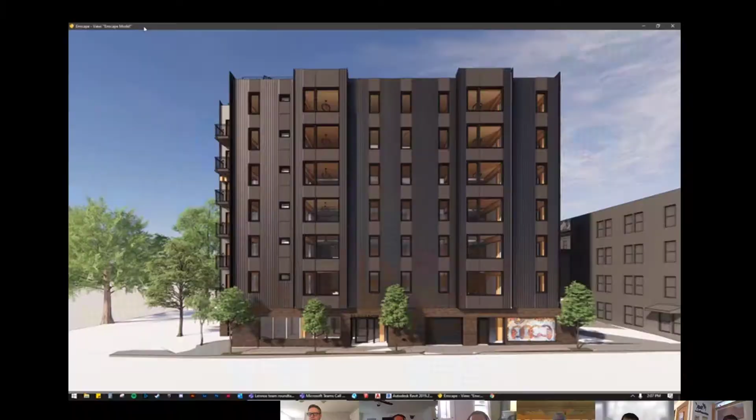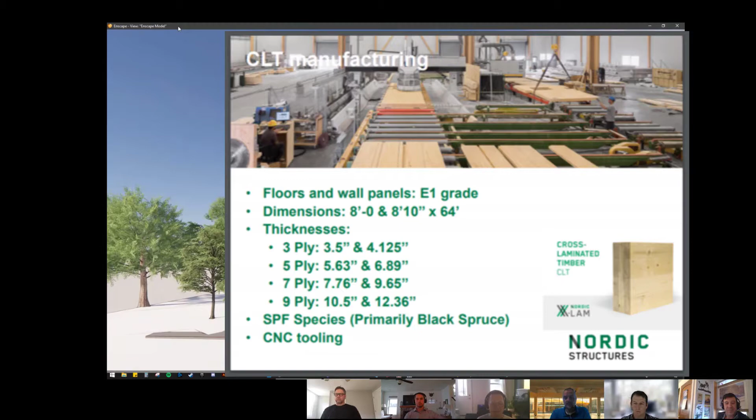I'm the business development manager for Nordic Structures. Been working with the company for 20 years and involved myself in the early phases when Nordic had made the decision to build a CLT plant, but before there was any real demand in the market. And Nordic's path to building CLT and mass timber projects, I think, is really informed a lot by the journey that we had to take. Because of the lack of demand, we became our own development company.

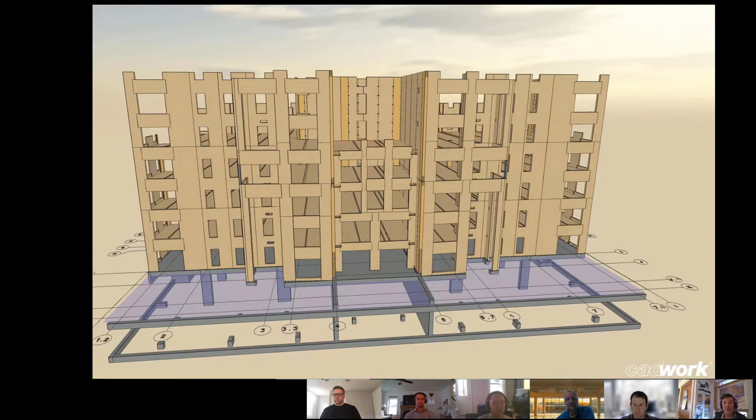But I recall when I told you I had this really cool young team out of Boston who was going for a 7-story wood structure with no podium in 70 feet. You might have raised an eyebrow at me on that one, and we might have not been sure these guys were going to be able to do that. Can you give us some hints how hard that is?

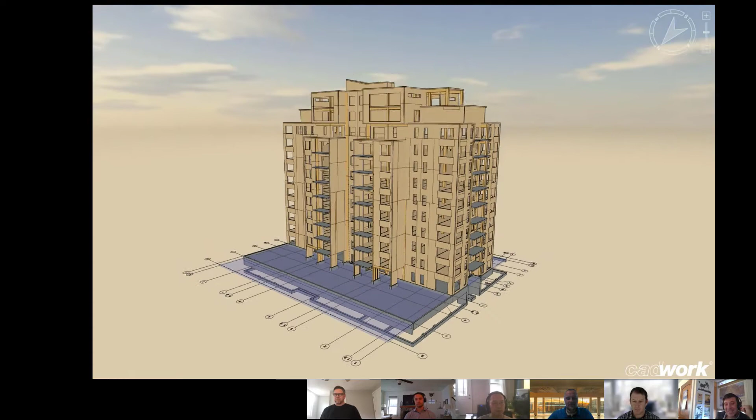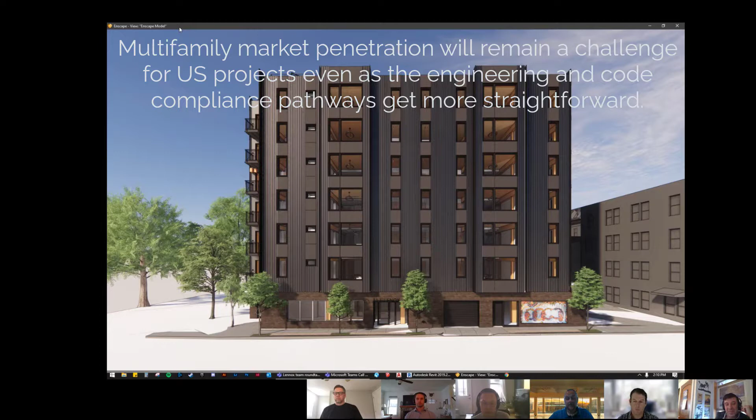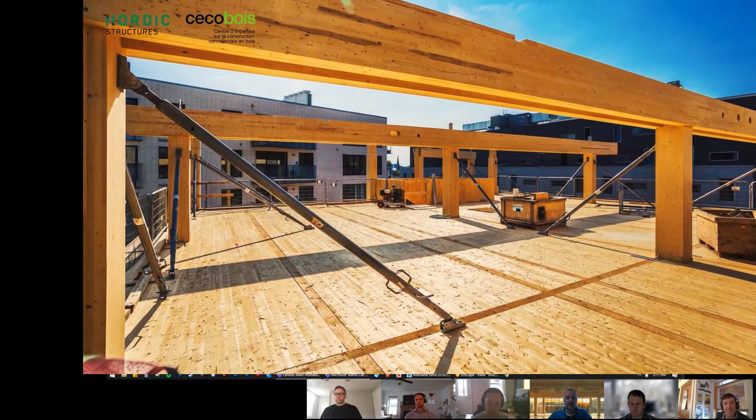Well, yeah, I think maybe my jaw dropped and the eyebrows raised, and a little bit of incredulity. We hadn't had a lot of success actually developing multifamily res in the U.S. There had been some projects that we had executed successfully, and actually the very first multifamilies that were done were for the U.S. Army. Fortunately for us, we had experience in Quebec, Montreal specifically, which is a very aggressive market. Concrete is incredibly cheap, and we were building 8-9 story buildings using mass timber, to be able to be competitive in that concrete jungle.

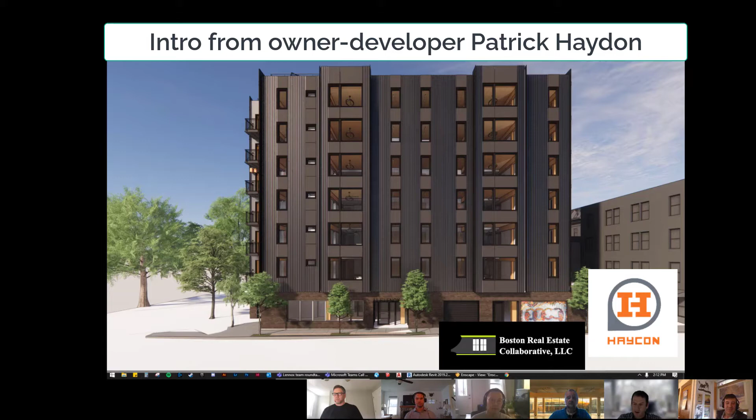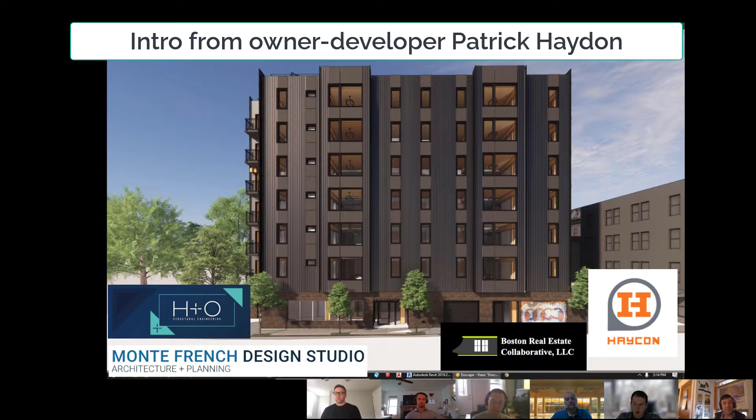Thank you, Eli. My name is Patrick Haydon. My company is Haycon. I work very closely with the real estate development group called Boston Real Estate Collaborative. We're partners in this project. We oftentimes work with Monte and Alex and Renz from MFDS and H+O. At first glance, the cost on a per square foot basis is very competitive to the 5/2 that we've built in the past 2 projects.

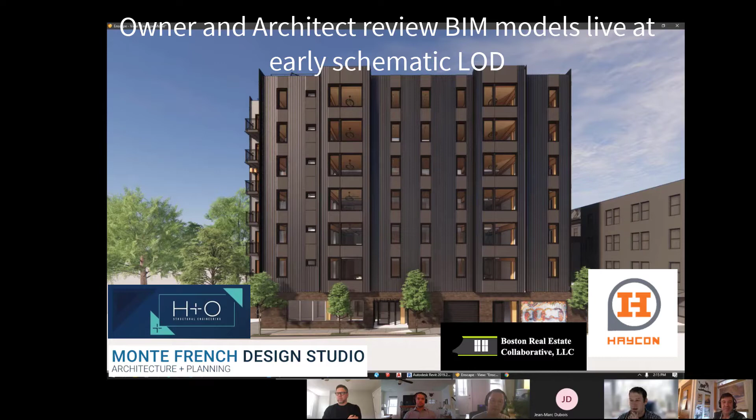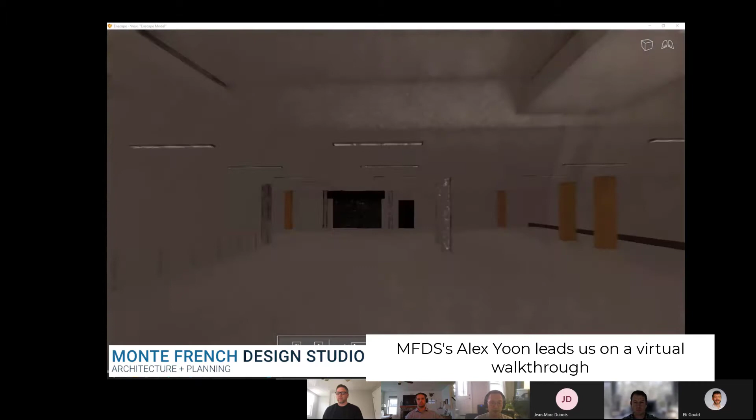We work very collaboratively and closely on these types of projects, and it's very fluid, which I think is the way to do it. There's not a bunch of work done in one vacuum or another where you have to go in reverse and redo stuff. On the ground floor, we have a small mechanical room for services and water sewer connections and whatnot. We have a small amenity space over on the left, and then over on the right, we have a parking garage.

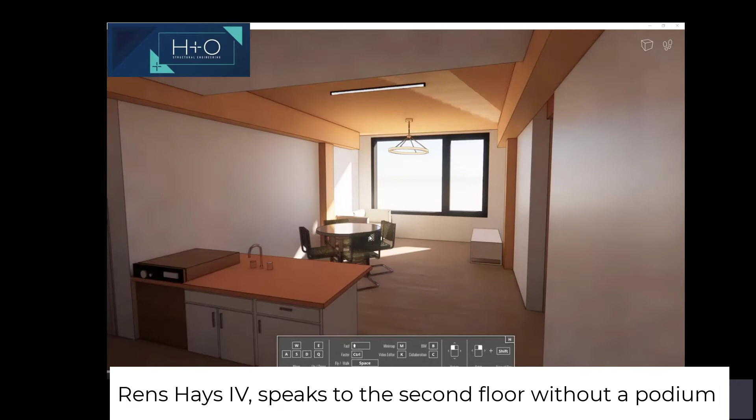To speak a little bit more to mass timber on the structure side, at 7 stories, an often complicated coordination piece, especially with building heights and column layouts, is when you do a 5-on-2 podium, that level 2 often wants to be a residential floor. And what happens is you're trying to marry the second floor to the top residential floors, but it also has to have some program alignment with the first floor.

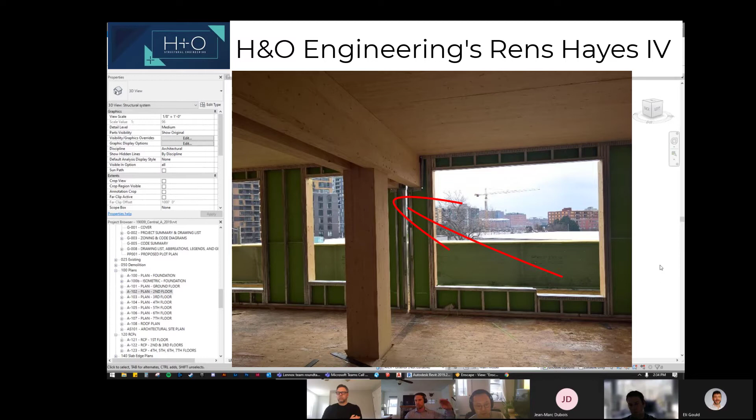And taking that whole vertical pathway for the services through the opening in the beams, to me, is just indicative of the can-do approach. It simplifies that detail and also gives flexibility. You can have full height windows up to the bottom of the CLT plank. Gives a real thin profile on the exterior of the building.

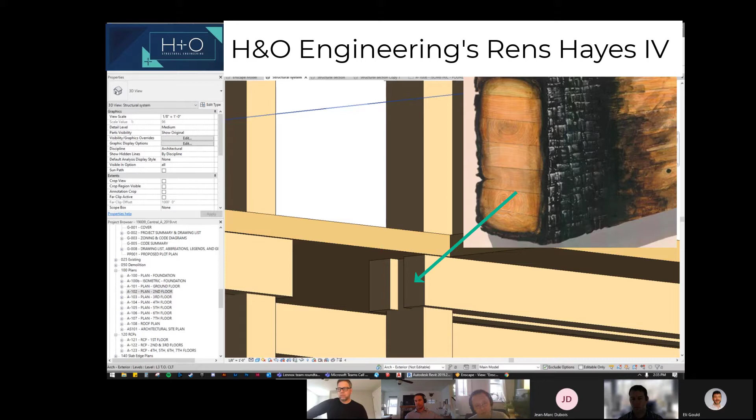The key detail on that joint is, with a mass timber building, the char performance is how it achieves its fire rating. So we have to analyze all these sections under charred conditions, and the beams actually protect the center of the column and become the char layer on the center of the column at the connection.

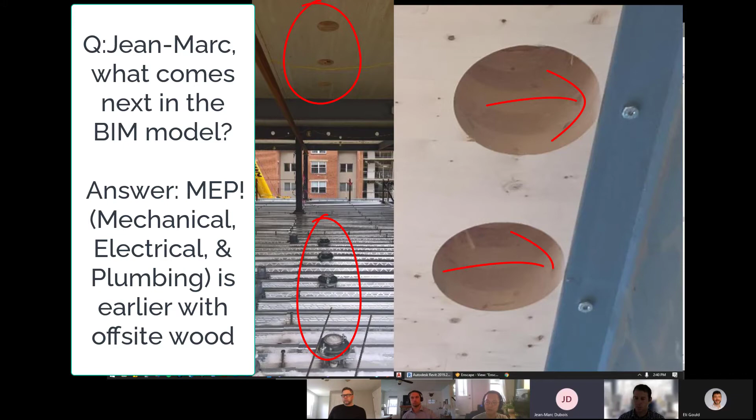The important thing with mass timber to consider is that unlike steel, concrete, and also light gauge on podium, the typical types of projects that they were involved in the past, a lot of times the integration of the follow-on subtrades happens at a much later date. We're manufacturing everything with CNC equipment at the plant.

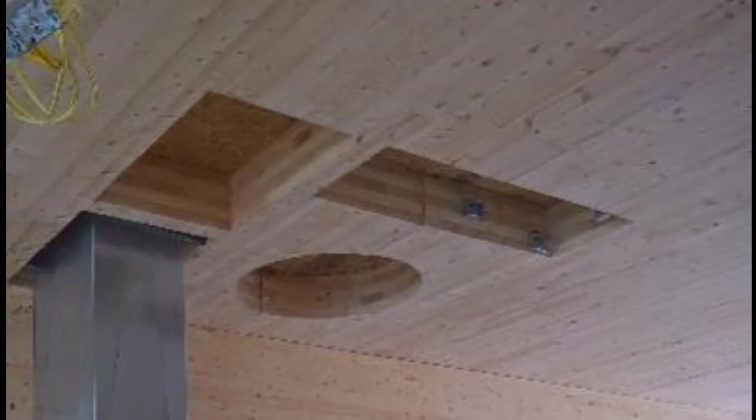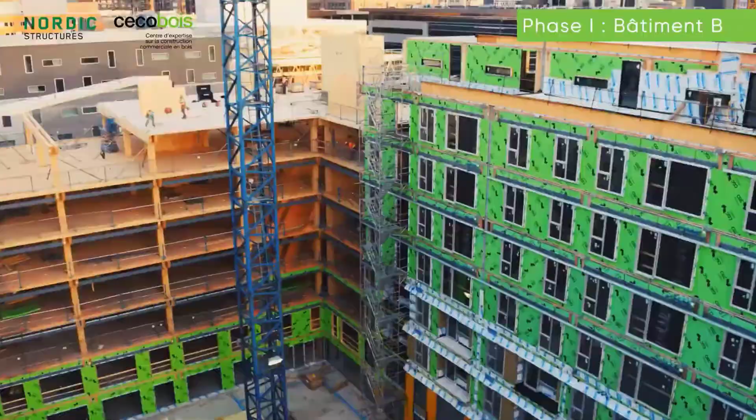The more we integrate with the mechanical systems, we're going to be working with the installation crew to make sure that we're sequencing that in a fashion that makes the most sense. In some cases on larger jobs, we may look at going vertical by sector as opposed to doing an entire floor. So these are also parts of the path that we engage in.

Well, I can tell this is a job we're going to have to check back in on continuously as we go forward.